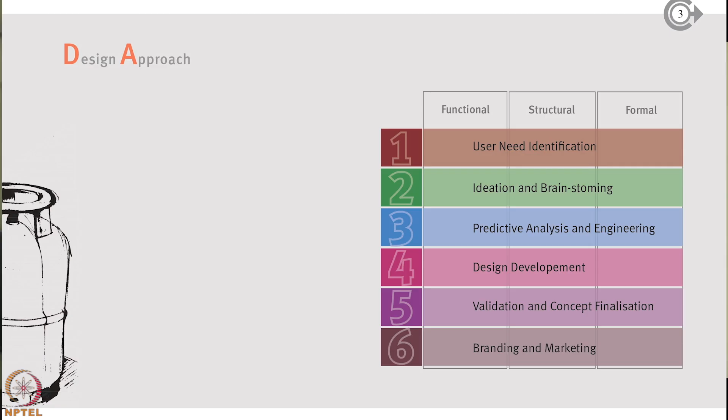Of course you'll do this, you've learned these processes in your academics, like how you do need identification and how you do brainstorming. And I think some of these processes are things I would complain about, coming from an engineer mindset. Engineers, we are trained so that we know the solution the moment the problem is given, right? And most often when we start building that solution, it turns out to be a wrong one. Designers probably take a more evolved approach to that, in terms of let's try this and probably learn something and build on that in an iterative way. So it took some time to get out of the engineer mindset and get into the designer mindset. But this project was a classic case study to learn and stay true to that philosophy even today, for whatever we practice. So hopefully I'll show you some of the works where you'll see the parallel.

Often we would complain about professors. This is hush hush. Hey yaar, mujhe aur concepts banane ko bol rahe hain sir. But it's so true, it's so true that you have to keep doing that.

You realize it only with age and a little bit of experience that there's no substitute to quantity in ideas and numbers in concepts and prototyping hands-on.

But this problem came to me in a very first-hand way, wherein I saw my cousin, a younger cousin, struggle to put on the regulator on the gas cylinder. And it looked like a fairly straightforward job. I went and said, hey, I know how to put it. But I myself started struggling.

And it kind of said a lot about how the cylinder was designed, for a simple task like putting the regulator on. But as I sat behind as a student of design and observed what happened after that, pushing the cylinder under the kitchen platform, making sure the knob was on, and all the hassle people were going through, it seemed like a good idea to think of the gas cylinder from a design perspective.

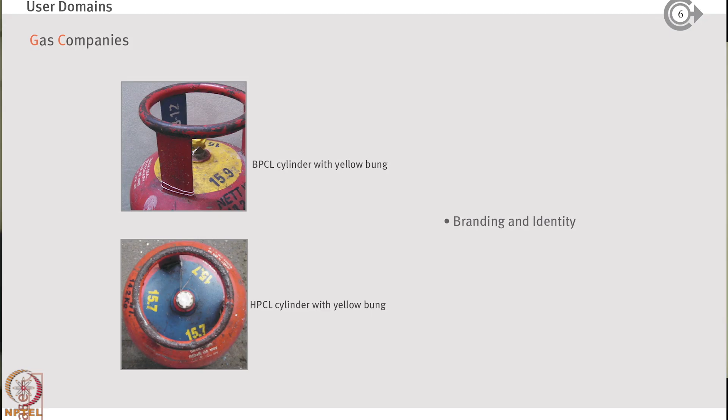Then we went out and understood why there were different colors, a little bit about how companies identify their cylinders. We went and saw how people were storing cylinders, how people would stack them. It's a very brilliant design in minimalism, people have found it stackable in design. You could load it into a small cart and take it around.

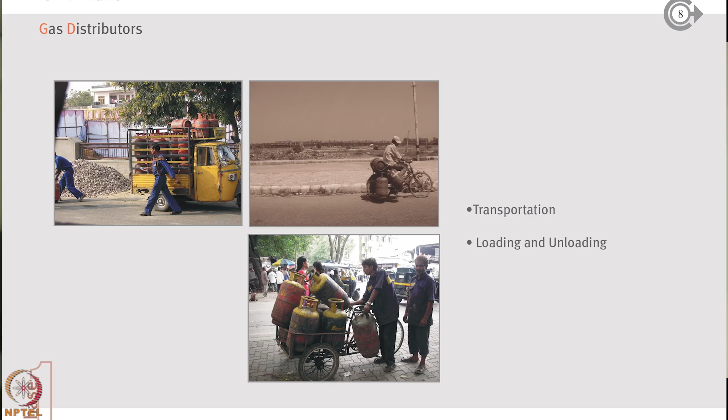So you'll see how people transport, and transportation was one of the bigger challenges around the cylinder, because not only is it heavy, but you also have to be careful about not getting it damaged in transportation. Like micro cracks, every time the cylinder gets bumped against something it will generate some stress in the material, and you don't want any accidents because of these stresses building up over a period of time, right?

So we spent a lot of time around the transportation issue itself, how people actually carry or do they throw them around. People do obnoxious things to cylinders, like unmentionable things from an engineer standpoint.

Then the usability aspect, how are people actually using the cylinder? Where are they storing it? What are their small struggles? Even when you get a sealed cylinder at home, it's a very smartly designed mechanism, but extremely difficult to unlock if you don't know how to do it. Try doing that, lifting and putting the cylinder on a trolley. Small aspects like these were studied and documented in this particular part.

Home users had stories like, my cylinder, I do not know when it gets over, and always there's a waiting time before the new cylinder comes in. I'm sure a lot of you now have piped gas coming into your houses, so these problems you may or may not have witnessed, but things are a little different for people who still get filled cylinders at home.

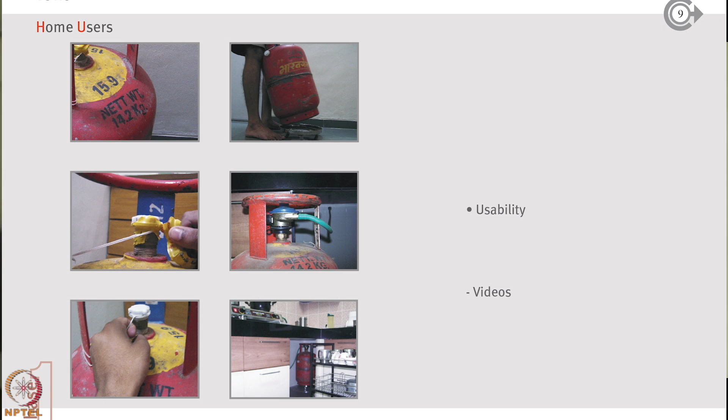Delivery boys - so you talk to them, you understand what are their problems. A lot of them, cycles have gone, and EVs and scooters have come in where people are carrying these cylinders. But I actually saw a Sunny - do you know what is a Sunny moped?

It was this tiny moped, and somebody was carrying a gas cylinder on the foot, and it actually split in half. So I had seen this in my memory, this incident of how people carry and create accidents on scooters.

So the product itself, if you treat it like a person, you ask it, hey, what are you made up of? And you ask, why are you made like this? So you kind of go down to every single component, you kind of measure out a lot of regulated products.

Like a cylinder has a lot of regulation around it. You cannot make a cylinder of your own fancy just because you wish. You will have to get it certified from an engineering agency like BIS. And often they are standardized so that different companies should make it, but they should all have a structure, a shape, a form that is standardized.

So there is little wiggle room for us to be creative in a regulated product like a cylinder. It's very important to understand why these regulations exist the way they exist. So your creativity is within a zone of reference. It is not necessarily an impediment to creativity, it is a structure to creativity if you understand the regulations.

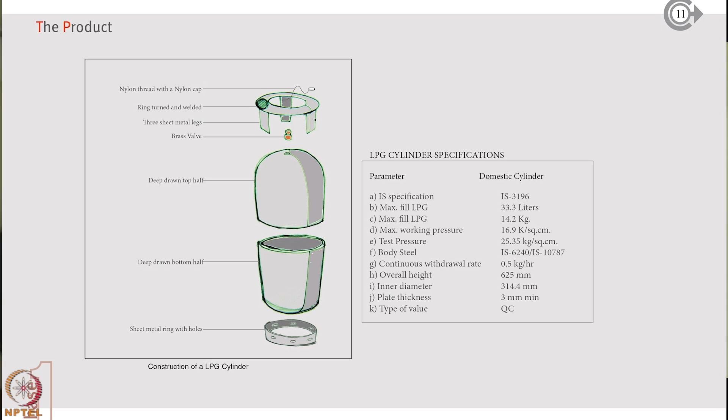So here you will see everything was dimensioned out, the materials are specified. Why are they? Try to get into the material aspect. Even as designers, understanding material properties is key, because you will know how these materials will stand. You will not be able to influence the design of a product like this otherwise.

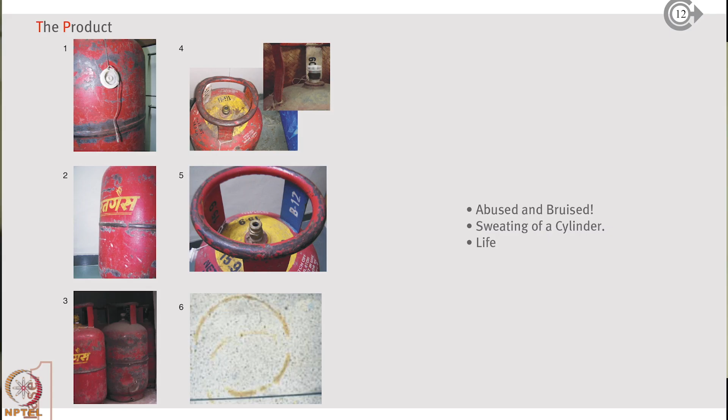Then you look at things the product has gone through. You ask it with your eyes, hey, why are you so bruised? Why are you so battered? What happened to you? And the product will tell stories, visual stories that are easily observable. Then you ask, hey, why are you kept here? So you see, I'm talking to the product in first person. This is a technique that I inherited from Professor Chakravarti - you make the product a person and the product will tell you stories.

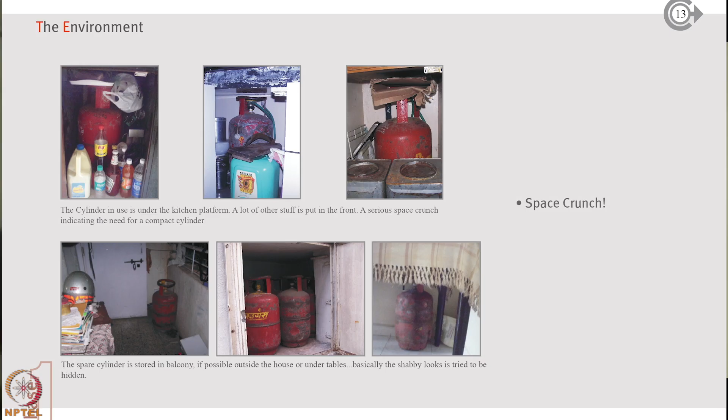So you will see it's in different positions. It's often the most hideous looking thing in the kitchen, so you want to hide it, you don't want to showcase it. So why is a product like this not so beautiful in its appearance, in its life?

And so you try to solve all these problems and you will get lost. So you have to have a single one-line problem solving statement as your core problem statement. You can't be solving all the problems - you want to solve them, but there is something core that you're trying to solve. That one-line problem statement we chose for this product was an easy to handle cylinder.

So everything else should be a natural byproduct of a cylinder that is so easy to handle, that it's beautiful, it's easy to lift, it's easy to put down, it's easy to open the regulator. All of that should fall naturally. The core is an easy to handle cylinder.

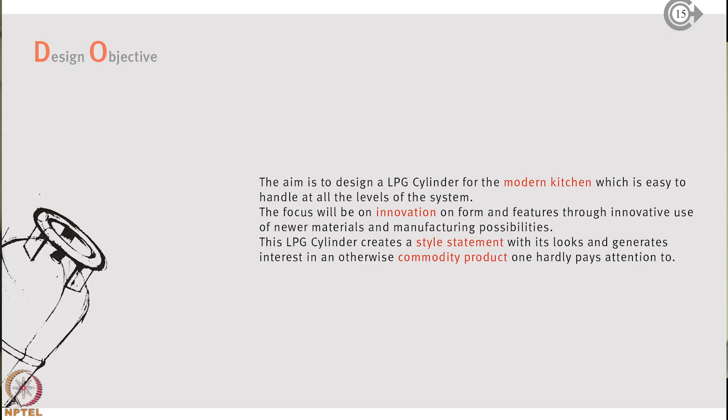And so we said, what does it do? It creates a style statement, so it's not hideous in its look. It's a commodity product, it has to have innovation, it has to fit a modern kitchen, it has to have a modern kitchen appeal to it. So you write down your objectives - what are you trying to do under your problem statement?

And then there are guidelines, the regulations part of it. It has to have 15 kgs of gas. You can't say, hey, my cylinder is beautiful, but it can take only 8 kgs of gas because of it. 15 kgs is a must have. And the regulator is a regulated product, so it has to accept the standard regulator. I'm not going to create a new regulator for the cylinder.

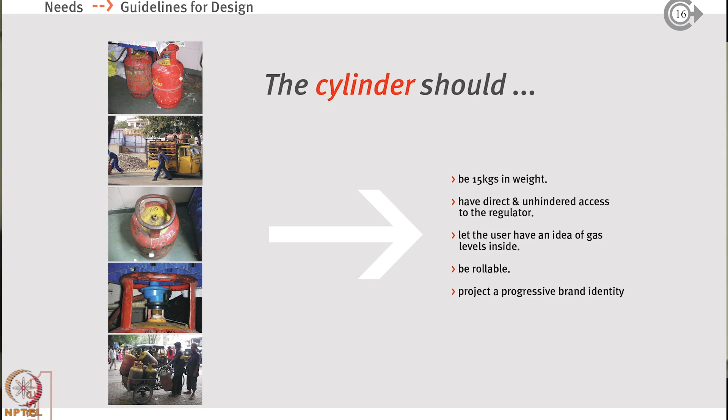And we said that the user should know the level of gas inside, and it should be rollable. I mean, when I revisit this now, the way I understand how design briefs are written, I would change a few things about this. But nevertheless, these are pretty much top level nice-to-haves, must-haves that you're trying to achieve in your cylinder. And I think this is where the maximum learning for me happened in this project.

How do you do brainstorming? Because you tend to get in a rut. You start doing ideas and you will see that all ideas are sounding very similar, looking very similar as you go forward with them. And then you want to create new ideas, which may be wild at this moment. So you use techniques like direct analogy.

So what if the cylinder was like a Tesla car? What would it do? Then you do fantasy analogy. Like what if a cylinder was to be used on Mars? Would it be any different? What if the cylinder was from a Marvel or DC universe? What would it be? And things like that.

So you're using fantasy, you're using imagination and saying, I want to design a cylinder for the Mars universe. And probably it will come a little differently to your mind. So it will help you break out from the engineering mindset here. Then you do indirect analogies, and then you do personal analogies. Personal analogies are like, what if the cylinder was a 5-year-old child? What would it do? So you're creating a personification over there.

And then you will see that you will have an idea pool. And I'm pretty sure you've done this chunking of ideas and mixing them together and creating new ideas. So these are techniques very, very useful.

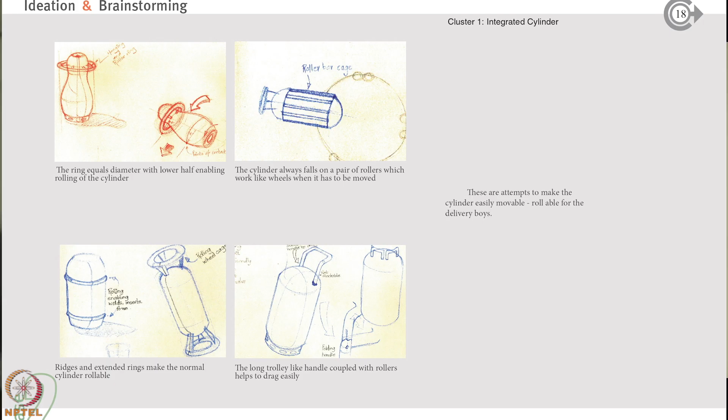And early sketches, like how can I roll it? How can I protect the cylinder? If you see the cylinder, it has a weld, which does not allow it to be rolled in a straight line. So one of the insights was, if I want to roll it, because of this welding in the middle, the cylinder will always rotate in a circle. Like it will go around in a circle if you roll it. So these are all ideas to roll it in a straight line.

Then we said, what if it was easy to lift? Like I want to embrace the cylinder and lift it. So these are all ideas to kind of lift it in an easy way. So if there was a ridge, you could wrap your arms around it and around that ridge and lift it.

But these ideas were also around manufacturing, around how can I use it. So these current cylinders, they are welded. If I were to use spinning, it's a technology wherein you use sheet metal and you press it on a turning kind of machine against a wooden pattern. Now the advantage is you can use much thinner material because it does not need welding. Welding will need much thicker material, right? So how do you go thin is by avoiding welding. So if I don't want to use welding, what are the ideas that I can do? Because welding would require 3 mm of plate thickness.

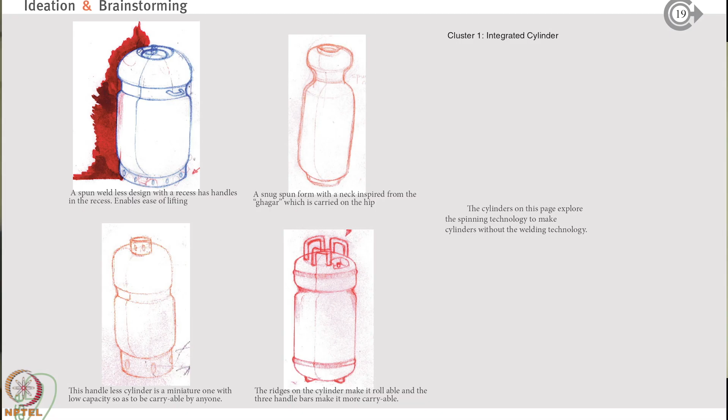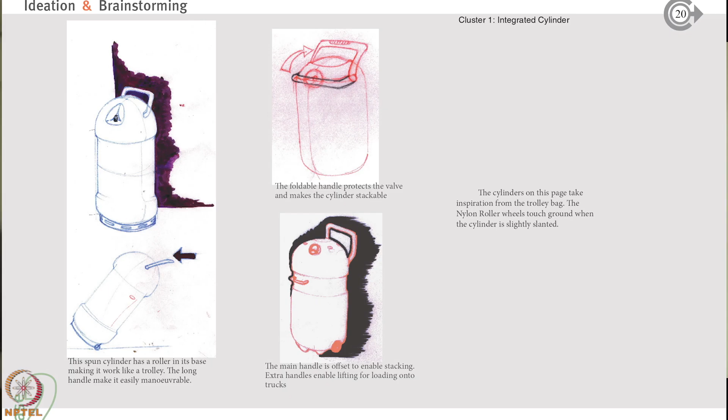These whole set of ideas came around not using welding as a manufacturing technology, because if you can avoid welding, you can do really smart cylinders. This is again like merging a couple of ideas, creating forms, using spinning as an idea. Then I said 15 kgs was the gas that was required.

But what if it's not one cylinder, it's a stack of 3 cylinders, which are easy to handle. Then you could do like an integrated modular approach. What happens if you do that? So there's a bunch of ideas that come around that idea.

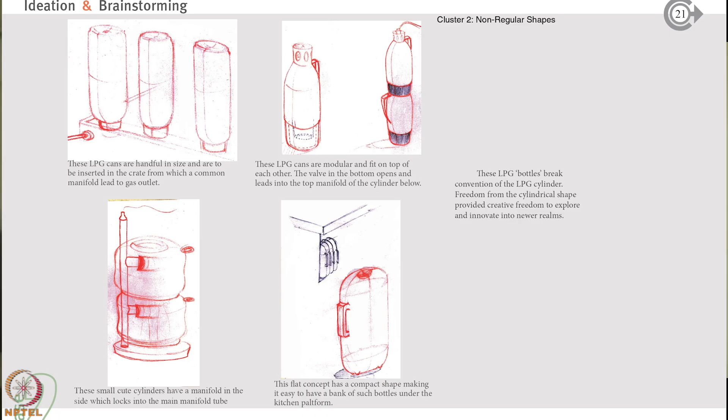And then you said, why do cylinders have to be cylindrical? Aren't there any other better form factors that allow you to do cylinders with, let's say, stamping or sheet metal formation technologies, non-regular shapes? So we went around and did these.

The handle actually was, why should the handle be always there? It could be sort of movable. Very nice, go ahead. So the current handle is actually not a handle on the current cylinder.

It is there to protect the valve on the cylinder. And so you see that there are these depressions here to protect the valves. We said we could protect it by creating depressions rather than creating structures around it.

These are all wild ideas. Let's not get into the feasibility of it at this moment because we are trying to be creative. There's a chance to evaluate and say what is feasible, what is not feasible at a later stage when we choose our final concept. And I'm getting closer to that.

So you will see, what if we do a spun cylinder and we put a plastic jacket on the outside? And this is where ideas started getting a little more exciting.

You can have all the protection that you want from engineering polymers, and engineering polymers is such a fantastic world that you could have an extremely thin cylinder, probably out of stainless steel. Stainless steel does not corrode, looks really nice, can take a lot of abuse. It's an extremely beautiful material, and you can spin it out into a cylinder, and you put on a really nice modern aesthetic jacket of plastic on the top.

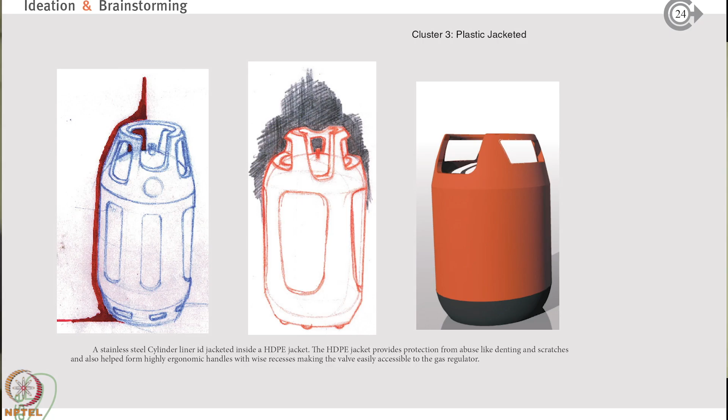And this started looking like the ideas were coming, they were freezing into a nice solid concept at this stage. And so with that as an idea that there could be a jacket around the cylinder, you start doing new ideas. Like now you're doing ideas around the jacket.

The cylinder is kind of sorted because the world knows how to make spun cylinders. It's not a new technology, but you are saying, how can I bring this technology to a product and make it more suitable for the context and the journey that the product is going to have, right?

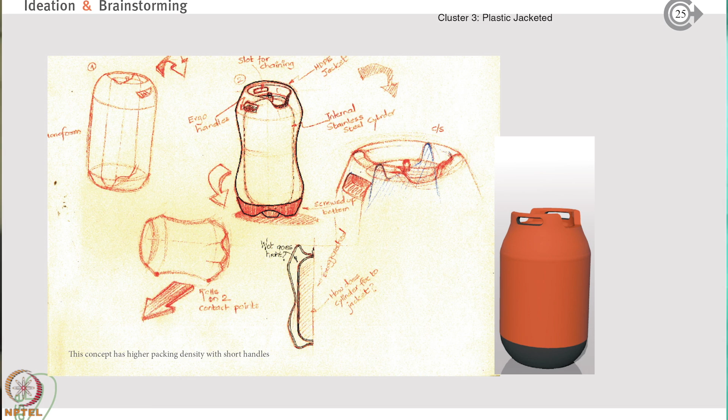So you will see that, does the jacket need to be full or can it be half? Now, this is a half jacket concept. I don't want to create a full jacket. How will you kind of assemble the jacket around the cylinder? It's not like a carry bag, right? Like you put it in a carry bag kind of jacket. So these are ideas around that.

And then once you kind of see that the ideas are there, now you want to know what kind of shapes do I want to make. So for 30 liters, I think I love this slide now when I look back at this, because there's a diameter and there is a height, and both of them determine the volume.

But imagine you're stacking them up in the truck and taking away. You could probably have one more layer of cylinders in the same truck. So you're going to really work on the logistic cost of it. So I really love this slide.

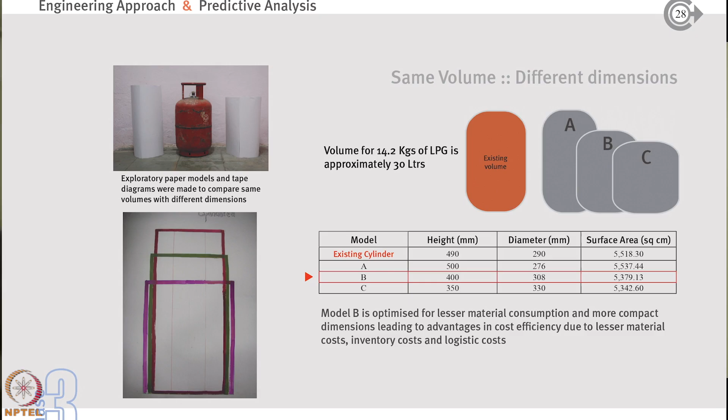When I see this now, I had totally forgotten about this slide. But this is all engineering put in a very creative format, like changing the diameter, increasing the height. What is the effect on that? And now this is probably a little more hardcore engineering, so you're trying to figure out how much pressure it can take and things like that.

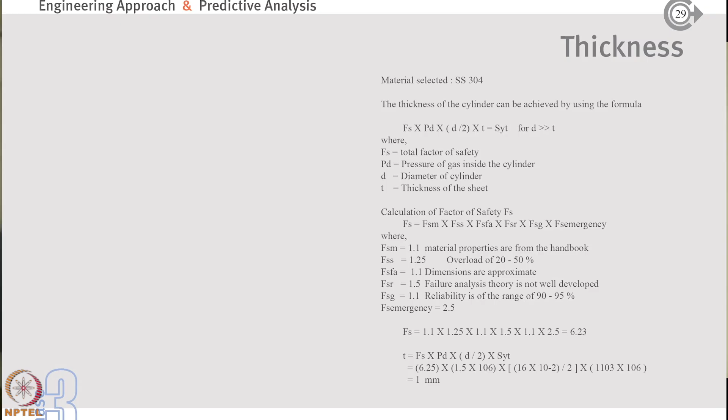I'll skip this, but it's important. If you can't do all of this, you need an ally, a team member who's really good at it, because beautiful designs will fail with ugly engineering. You'll learn this with more projects, but there's always a need for an expert, and you can't be an expert at everything. Design is very collaborative for most products and digital solutions. The faster you can adapt to work in teams with extremely different people, the higher the chances of that product being successful.

Then we said, what are the possible materials? We looked at aluminum, polymer composites, stainless steel, and possible jacket materials. This was a little exploration on the material side.

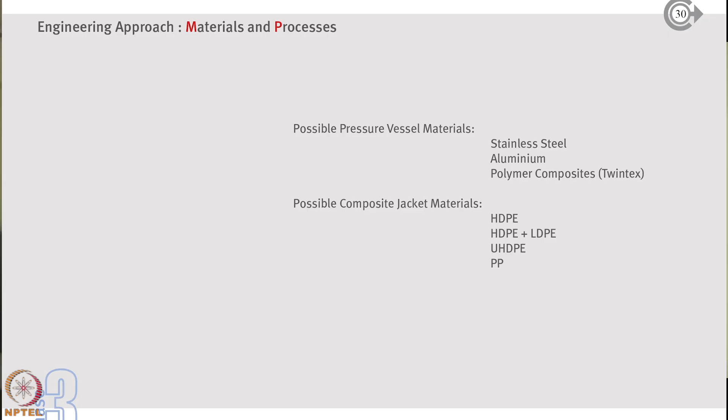Has this been done before? This has been done before, and you will see Chakku sir's letterbox in the whole image catalog when we were doing the mood boarding. Stainless steel looks like a nice material - however bad you batter it up, it's just a much more pleasing aesthetic.

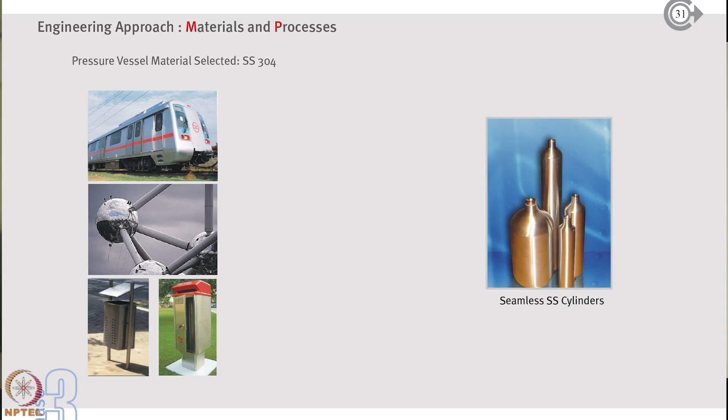How is spinning done? You look at the process - can my product be formed by that particular process? You understand it, and then you refine your concept. So now these are three lead concepts, an amalgamation of all those loose ideas that were floating around. We merged a few of those ideas together to form this concept. This is still a cylinder, but it does not have that.

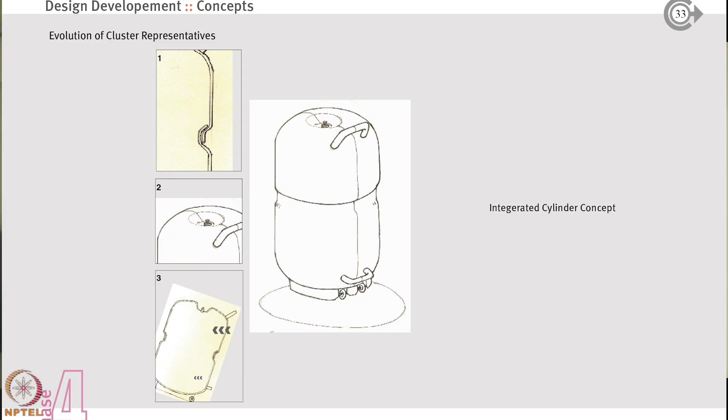Remember, the problem started with somebody struggling to put on the regulator. We said we will take out the cage and give much cleaner access to the regulator, but it's still protected. It's got this trolley concept going around, wherein you can drag it. Then this is an irregular shape, just because it had its merit of creativity. And then this is a jacketed concept. So there are three leading concepts with different ideas going around.

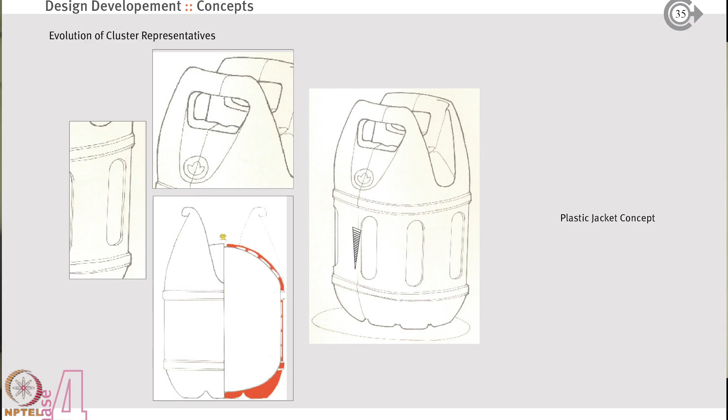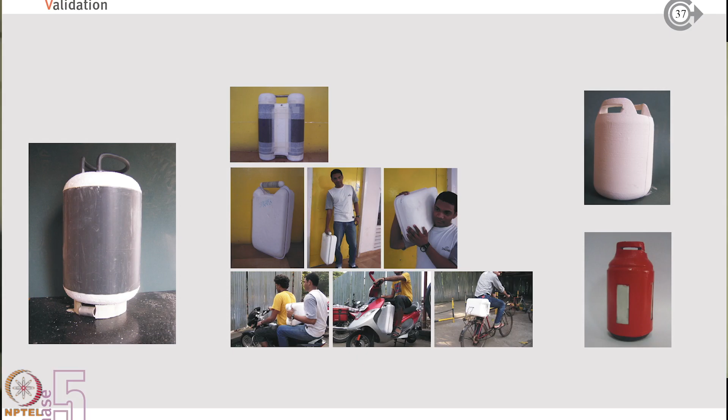Then you do a lot of prototyping - these are all models made, foam or thermocol models. You'll see the irregular shape got tested quite a lot for how it would get carried around a cycle, on a scooter, how somebody would carry it. Because there's this ridge - you'll see this is Amay Surve, a junior from my time, who is trying to carry it and saying that it's hurting my shoulder. There's a ridge that is hurting his shoulder.

Now you have three concepts, and you can't just say I like this concept, so I'll approach it that way. Of course you know in your heart, there's an intuition, but you want to back it up with a solid, objective rating. So you create a rating scale and try to rate it, asking how much is this concept better than the other. This is what a very early stage of rating a concept looks like.

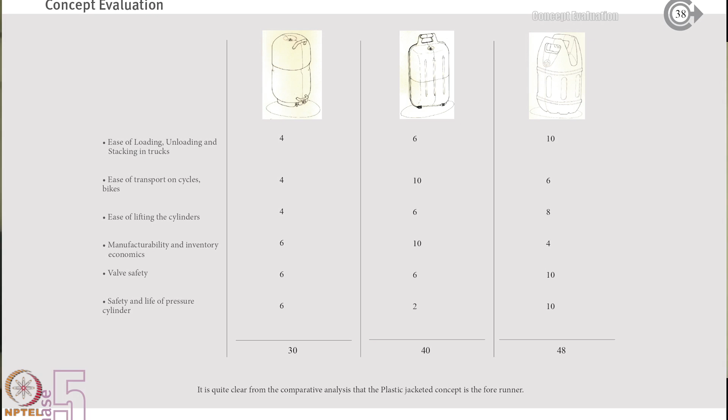Of course, now when we rate concepts, our evaluation metrics are much more evolved. We are also bringing in business aspects, life cycle aspects, and sustainability aspects when we rate concepts now. The rating is much more detailed, sometimes down to a component level.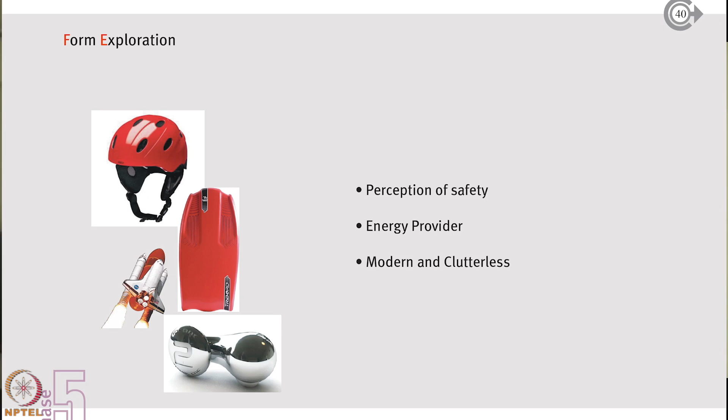So we said, this is it, this is what we are going to make. Then we started doing form exploration. This is my form mood board, a lot of red - I'll probably do this very differently if I do it now. And these were some early renders of different forms that we did.

There's a lot of inspiration - some things were lifted off that, but the core concept itself from an engineering standpoint is very different, and that's where the originality of this particular concept comes in. You'll see we are trying to make it cuddly, trying to make it sharp, trying to keep it close to the cylinder shape it is today, but as a modern version of it.

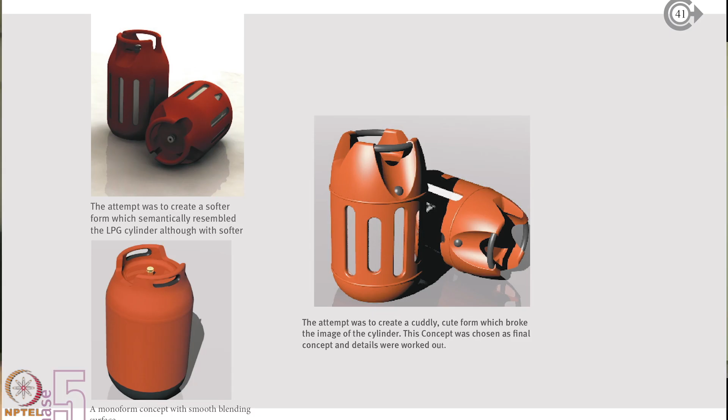We said, if we make it rounded, cuddly, like a teddy bear - if teddy bear is an inspiration, how would it go? So different form options here. And then you'd start doing the engineering detailing of it, like, can the jacket be made in a single mold?

Should the left and right molds be just mirror images so that they match, so that you can benefit from less tooling and things like that? And then we created this...

Cage kind of an effect so that you can see the beauty of stainless steel inside. Why should you hide a material that is inherently beautiful? It also reduces the weight of the jacket in some form.

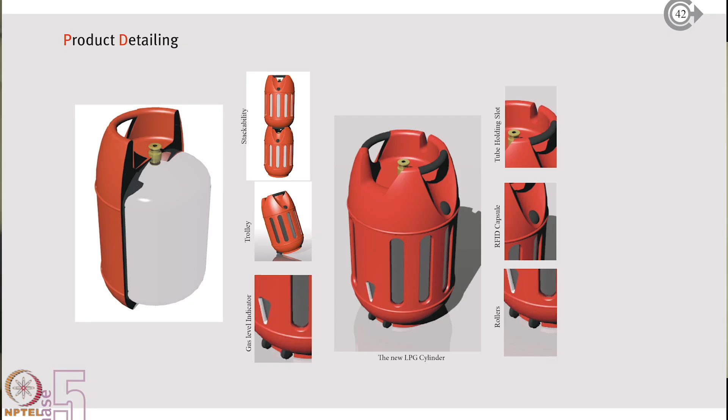And then we said we could put in an RFID chip inside so that we know how many times it has been filled and refilled. So there's a little bit of tech angle coming here. It is at a concept stage, so no more detailing on this.

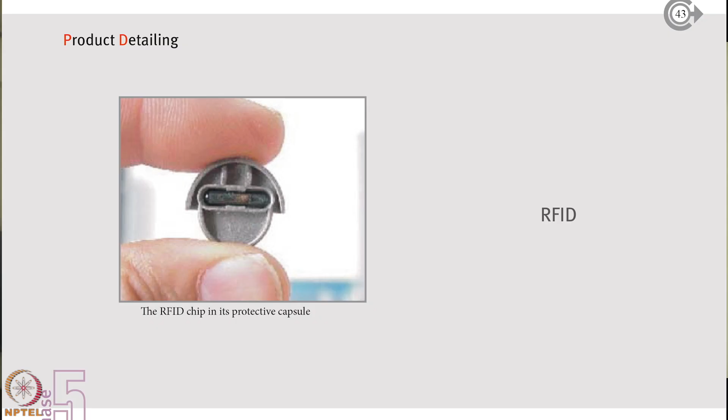So when gas leaves the cylinder, it actually boils. It's in liquid form and it boils and goes into gaseous, and this creates a cooling effect in the cylinder. So we came up with this idea that if we had a temperature sensitive liquid crystal display, when the gas levels hit that level, it's going to change color because of the boiling inside the cylinder. So the moment it turns a different color, you're going to know it's at the empty level, or that's the time to reorder a new cylinder.

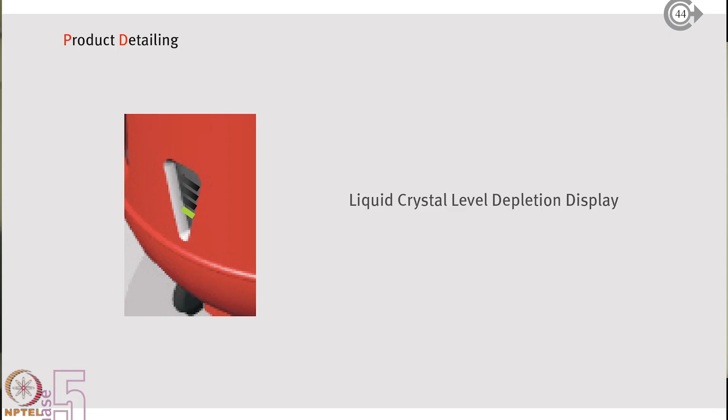And the wheels in a cylinder, they look like an afterthought because I loved that idea from the beginning. And that's you see me being unfair to the product by bringing in my love for a concept and forcing it into this concept here.

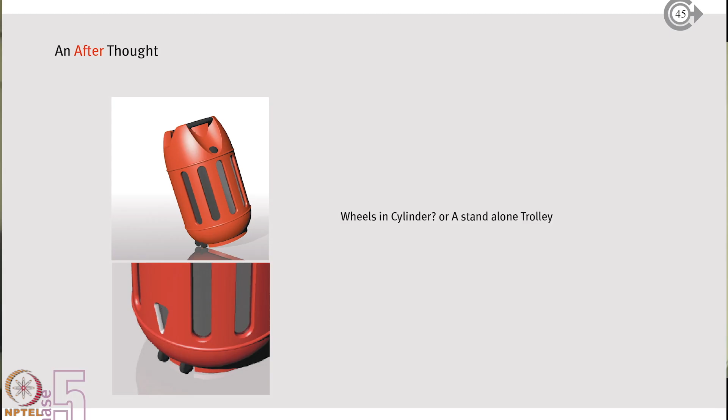Again, a lot of tech spec around it. This is how a branded version could look like. I cringe at the name now. It's probably a bad choice of name. Easy Gas sounds more like some digestive pill that somebody was making rather than a gas cylinder.

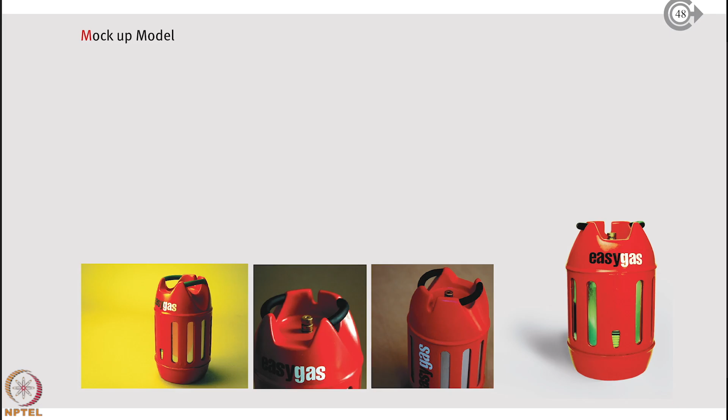And then you make really good-looking models. In fact, Pushkar, this model is still available with us in the studio. Yes, sir, you shared a photo with me, and that was so cool to see. So these are all made to a scale of 1:4.

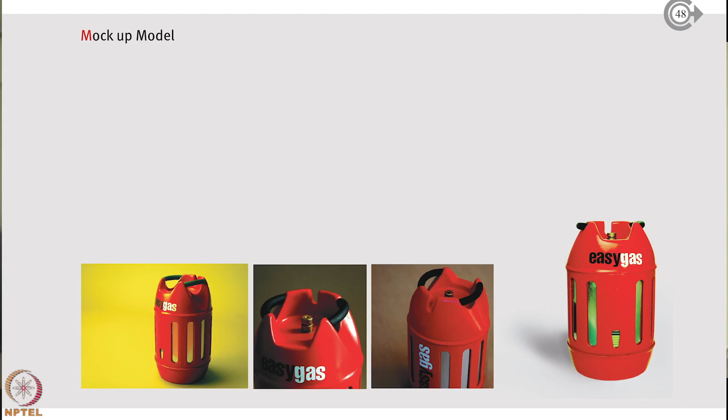And when you photograph it, it should look like it's a real product. So for 1:1 scale comparison, of course, it was a little too tedious to make a 1:1 model. So you do a montage and put it next to a friend and say, hey, this is how it's going to look next to you. So that's Varun, who is a great animator from my batch, posing next to a cylinder for 1:1 scale comparison. It's really small.

But it still has the same amount of gas, so there's no cheating there. But I think this is the end slide of this particular cylinder story.

And I remember, there's a new angle that things changed from here. I was so glad this presentation back in the day went extremely smooth for me. Not a single question got asked by any jury. Everybody loved it. Satish Gokhale, who is a dear mentor now, was there as an external jury, Design Directions, he was the examiner. Oh my God, I see.

Satish Gokhale runs an industrial consultancy house in Pune called Design Directions, and he does a lot of projects for the defense and technology-led projects. And he's also becoming an entrepreneur. He starts manufacturing some projects. So it's very, very effective.

And one of our students this time, Snehal, went there for internship, and she just came back with some very good learning. So Satish immediately offered me an internship after the presentation. He's like, you should come join me. And I grabbed that. I'm so glad there was so much more learning there.